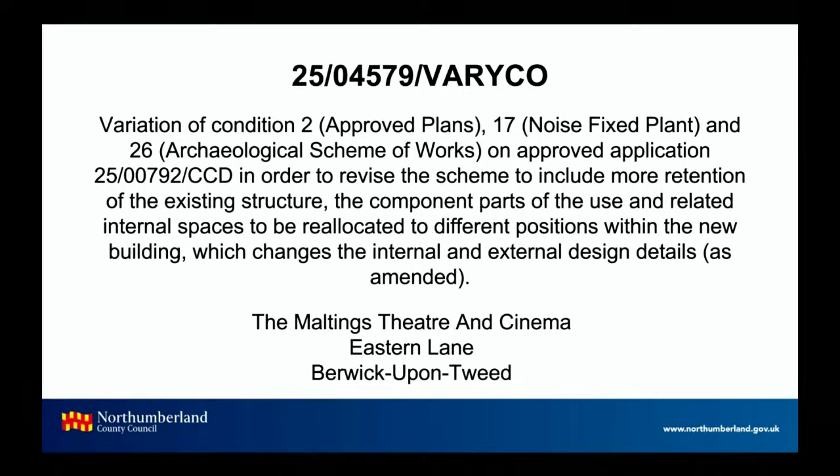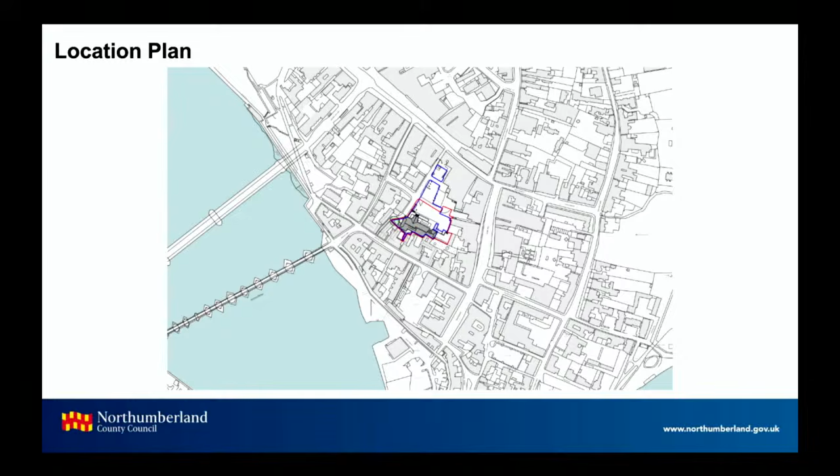This is the constraints plan, so the application site is highlighted in yellow there. All of the blue polygons that you see are listed buildings of one description or another. The red line down in the bottom left-hand corner of the site is the boundary of the Berwick Conservation Area.

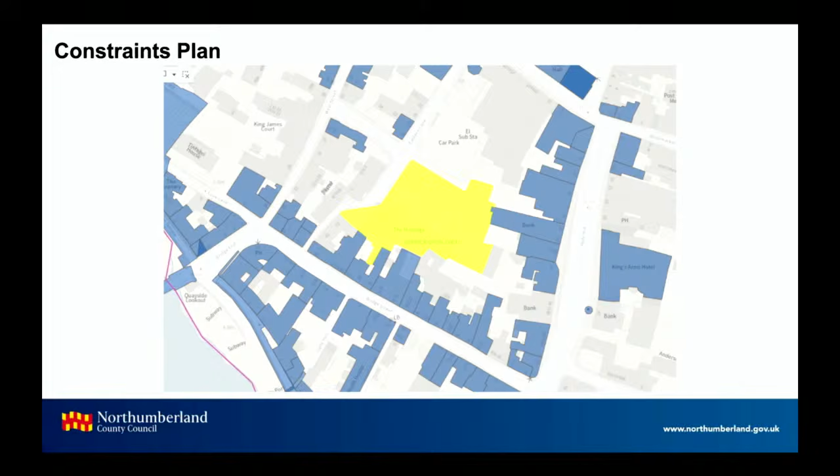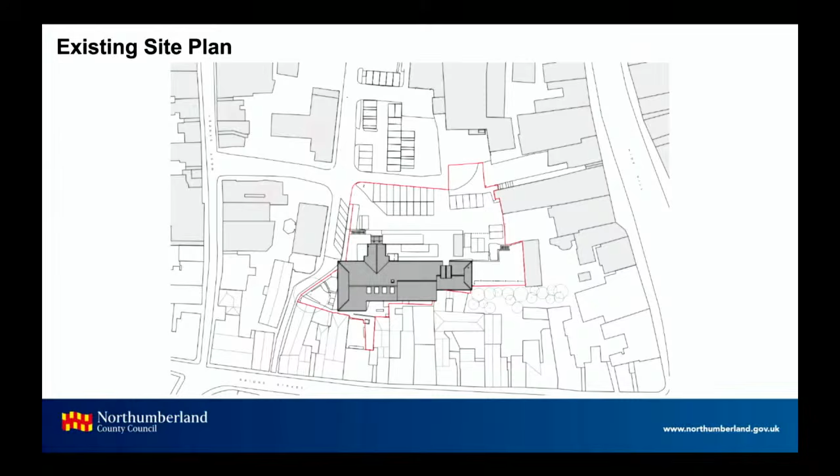The following slides I've grouped together into existing, approved and proposed plans in each case, just so you can get an idea of how the building is currently, how it was approved last year, and what is now being proposed. So here's the existing site plan, the approved site plan, and it doesn't change too much - the proposed site plan there.

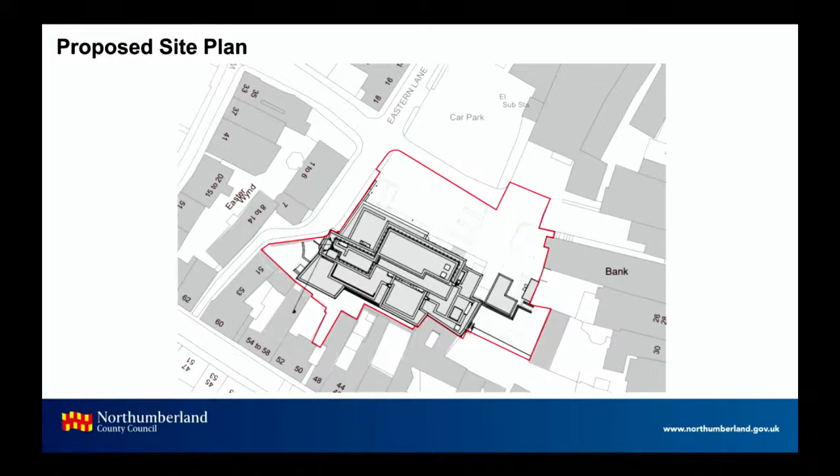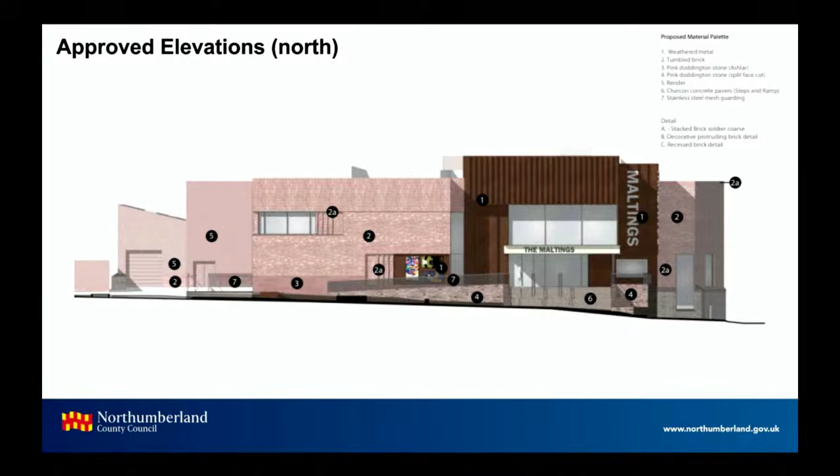Existing north elevation, so this is the front of the building facing into the car park, as was approved, and then what is now proposed.

The north elevation has been redesigned to reflect the new massing of the scheme, with the mass of the theatre wall broken up with brick detailing, allowing flexible space between those for banners and so on. The main entrance is defined by the incorporation of a metal-clad frame and layers of perforated mesh to provide interest.

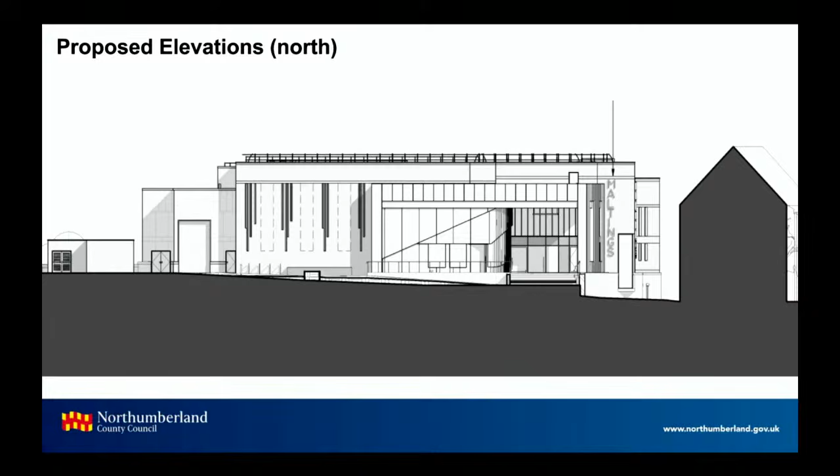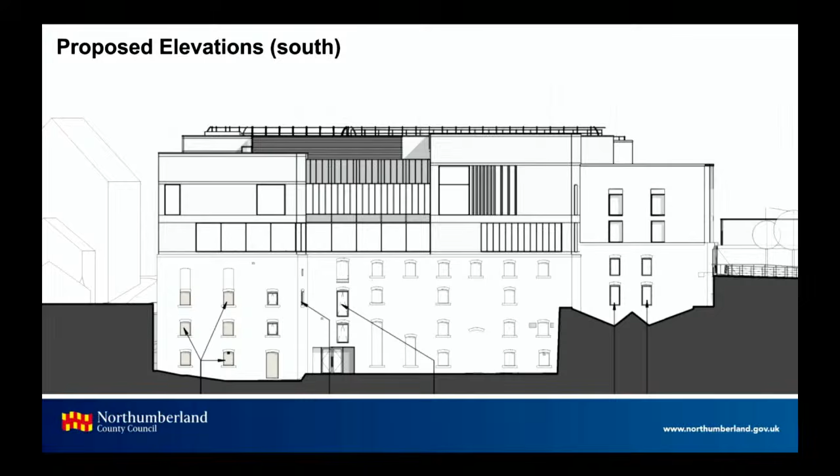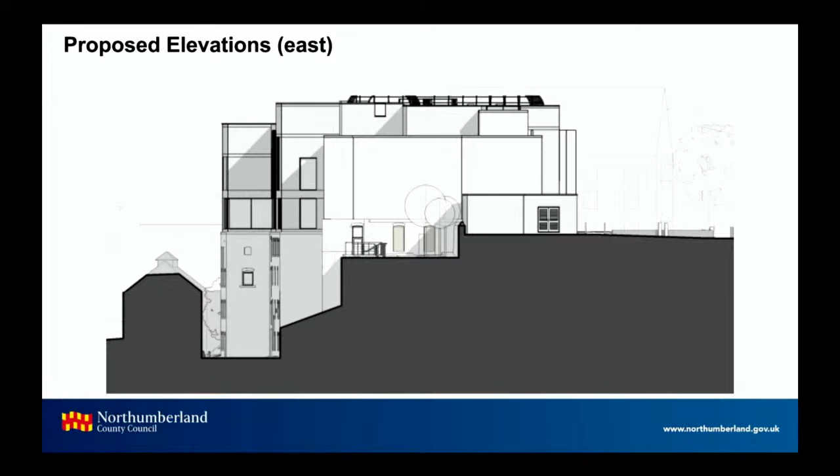The west end of the building is broken up with varying brick colours to clearly separate the two masonry forms. The east end, containing the scene dock and functional spaces, is proposed to be clad with fibre cement panels, coloured to align with the brick used elsewhere on the building.

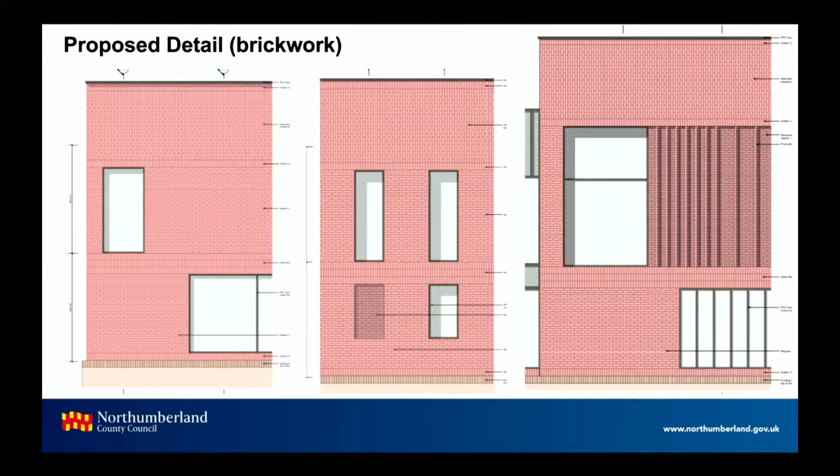Take you through some of the details - this is the proposed brickwork, and the proposed fibre cement cladding at the eastern end. You can see the scene dock door in the middle there. This is just some examples.

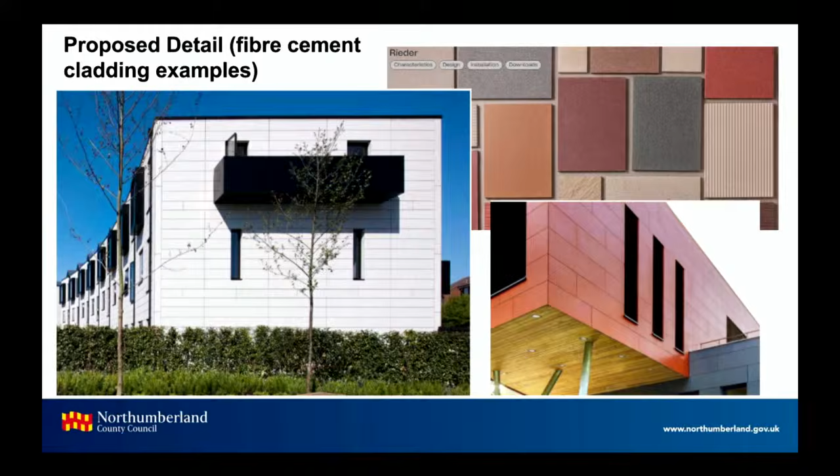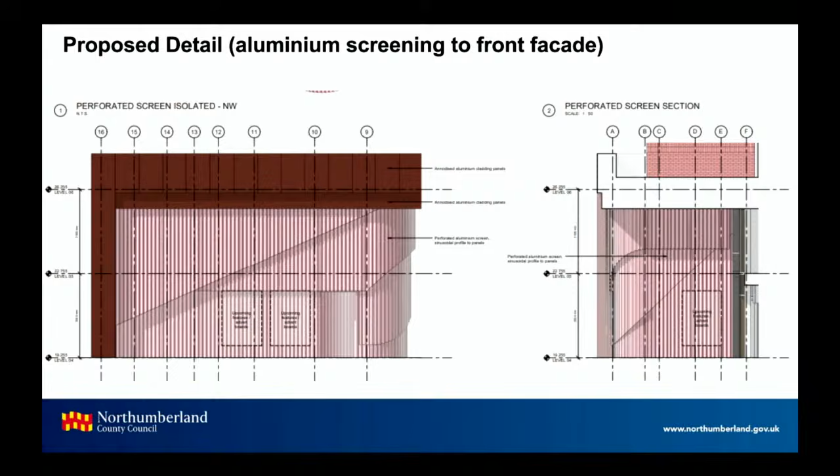This is the front facade, again the brick detailing there, and then the aluminium screening - you've got the frame surrounding it and then the perforated screening below, and then the curtain glazing to the south elevation.

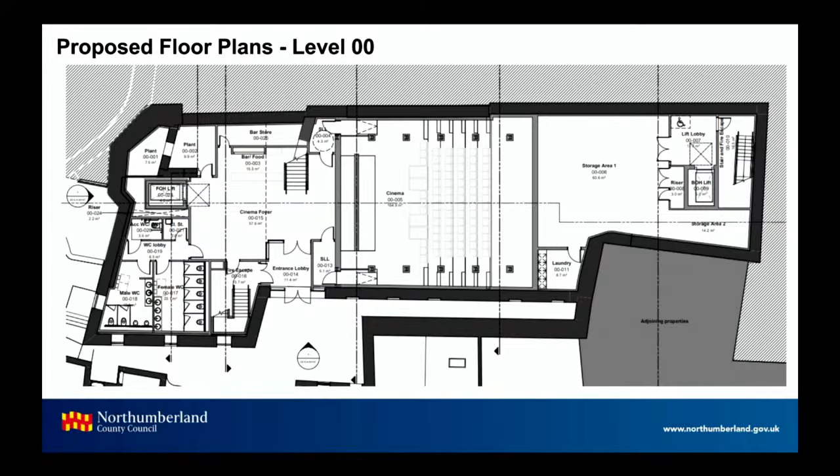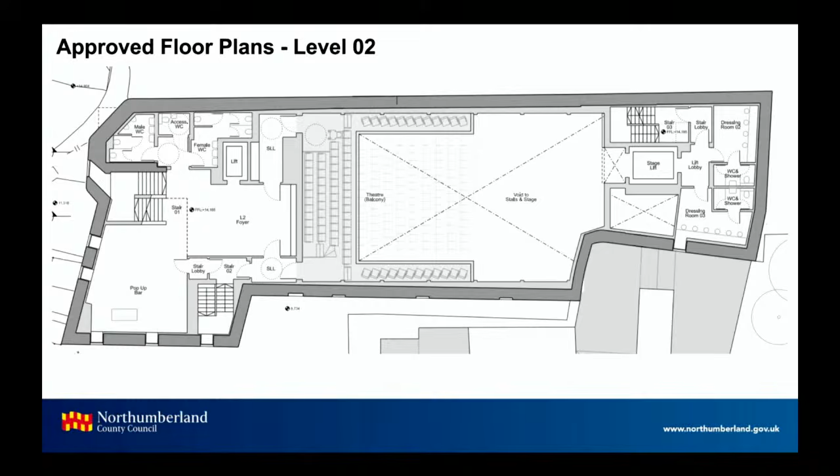Level 2, you start to see the theatre on the existing plans, and then it's again the void over the cinema on the proposed, with dressing rooms and so on as well.

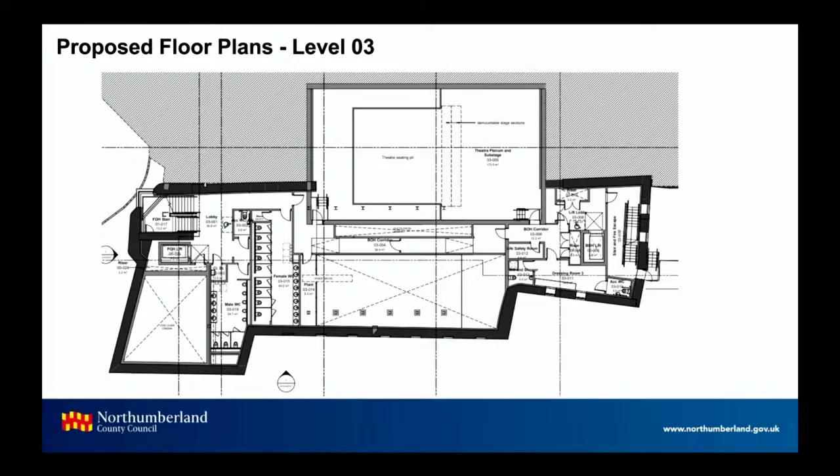At level 3, again the void over the original theatre, and then in this new proposed plan you start to see the substage for the theatre block, which comes into being at level 4, the main car park level.

Here you also have the bar, cafe and kitchen areas. At level 5, then you've got the theatre, the rehearsal rooms, the upstairs bar and foyer areas, and meeting room.

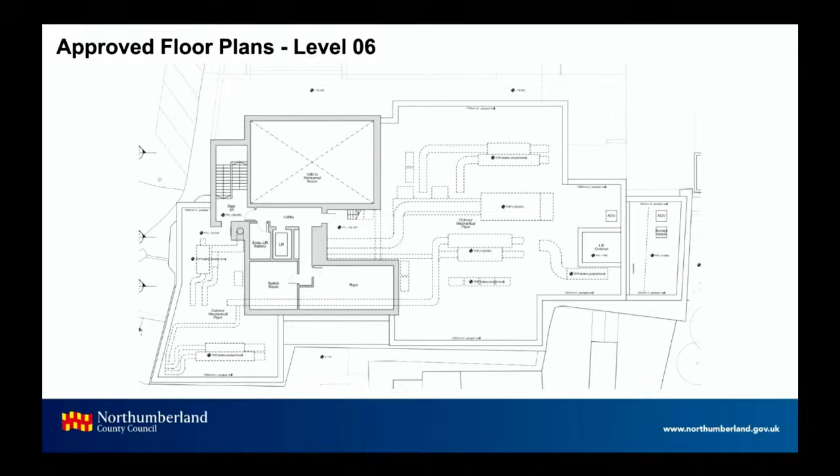Level 6 on the approved plans, that's the roof showing the plant. Level 6 as proposed is slightly larger - you can see the lift overruns there and where the plant's starting to go, and then the roof itself with the photovoltaic panels and the other plant showing.

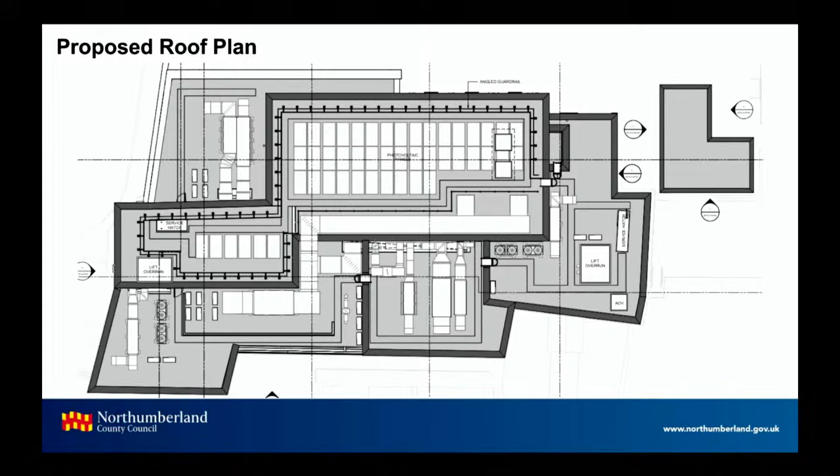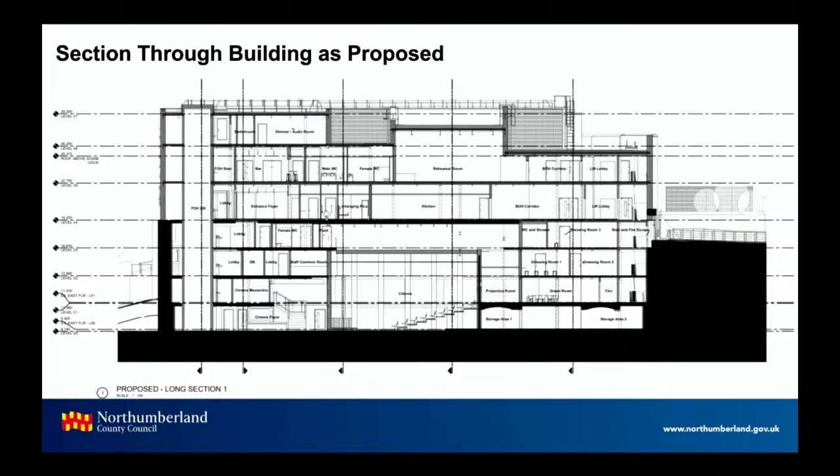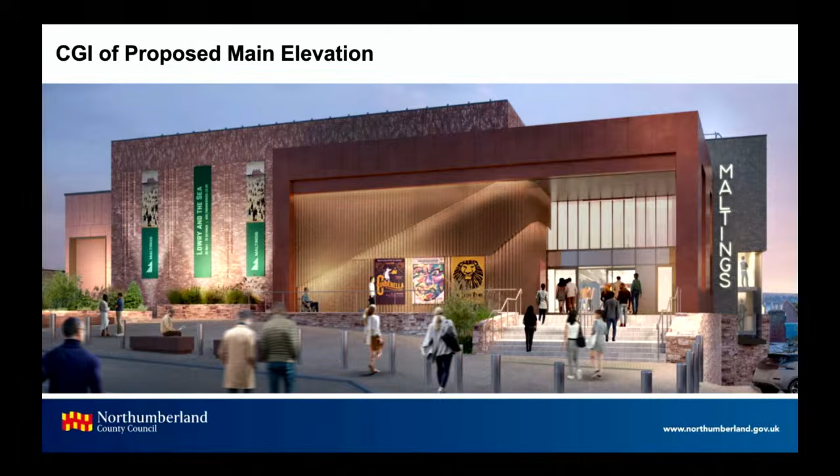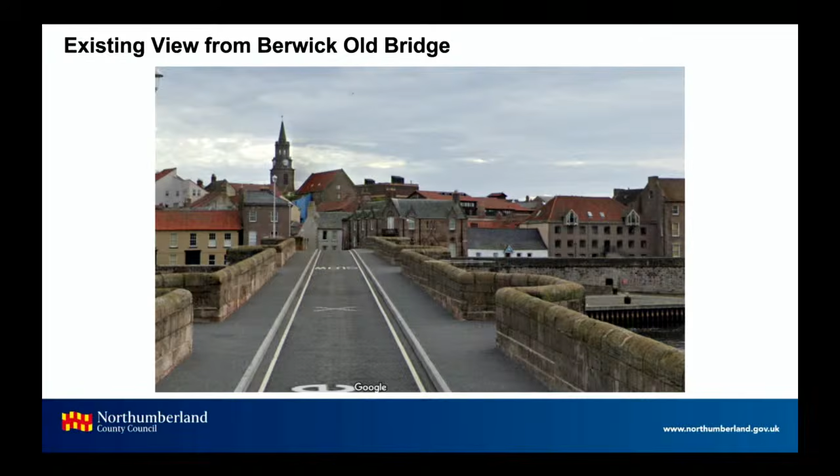A CGI of the main elevation as it's now proposed, and then some views with the existing theatre looking up from the old bridge, as was approved last year, and then as now proposed. One key point to recognise is the Maltings sign, which is no longer being proposed.

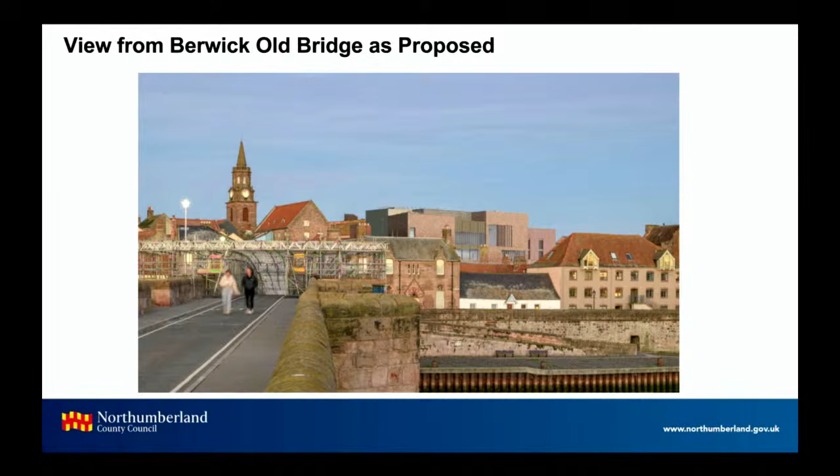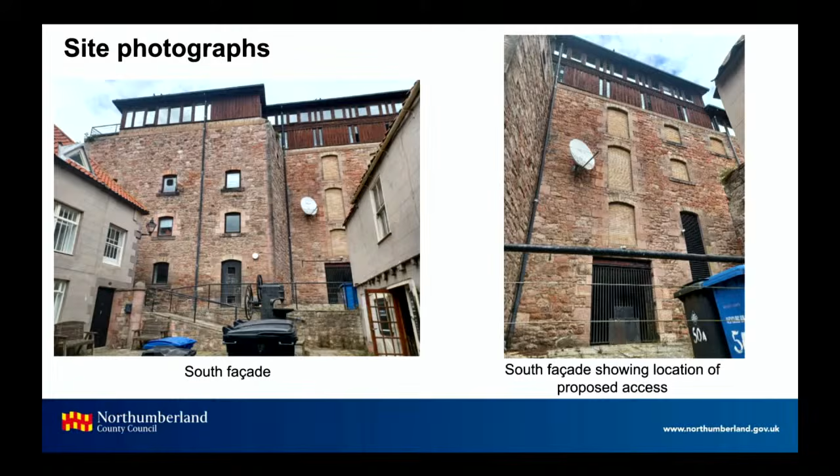So if I may summarise, changes made to the external appearance of the building result from functional internal changes. Concerns are noted about the perceived reduction in quality of proposed materials, but the question has to be whether this proposal is acceptable on its own merits, rather than whether it's better or worse than what was previously approved. Members are reminded that it was accepted that the harm identified through the original proposals was outweighed by public benefits in the planning balance. It's officer opinion that remains the case with the revised proposals, and as such the proposals are recommended for approval subject to the conditions attached in this report.

Thank you, Chair. I'm just being reminded about the consultation. Just to highlight, it's in the report before you, but just to highlight the number of people notified on this application. There were, as you're no doubt aware, a substantial amount of objections and letters of support on the original application. When this application was validated, letters were sent out to in excess of 500 people. Off the back of that, we've had 16 objections and I think 9 in support. So it's just really to highlight what we've tried to do to make people aware of these changes.